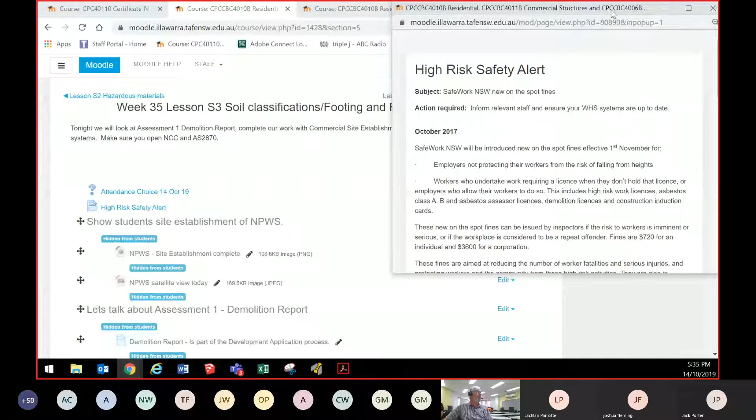So one of the first things we've got here is that you should be subscribing to information that constantly comes in that tells you about new changes or things, accidents, dangers or hazards that are coming up. Here's an example of one that came through some time ago, but I just got one this last week while I was away that came through from SafeWork, and there's newsletters and things that come regularly.

This particular one is a high risk safety alert for new on the spot fines, and this is to inform relevant staff and ensure your work health safety systems are up to date. This information is on SafeWork's website and comes through regularly. You need to subscribe to this now, just like you get Facebook or Instagram notifications, add SafeWork New South Wales for your notifications so you can keep up to date with what's happening and find out about the latest things, which happen quite regularly.

Now we're going to have a little look at some site establishment with the National Parks and Wildlife Service site that Brett was involved in down in Narooma. This is an example of one of the activities you had last week that Frank was working on with you, and here's an example of how the site shows you need some sort of description at some point as to where you're going to place things on the site.

Not sure if you've had a look at that site, the one Glenn did, but it's on Google Images and you can see it's all worked out pretty good. But somewhere on a site, when you often don't have much room, you've got to have a good plan in place to know where to put everything.

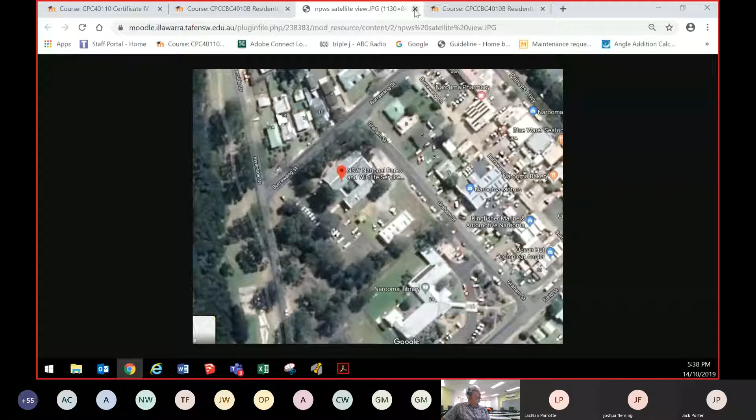It's really important that you come up with a site plan before you even go too far, so you know where to tell the trucks when they start delivering sand, bricks and materials onto the site. You have to make sure you know where things are going to go, and part of that has to be done on a demolition report.

So we're going to have a quick look now at the assessment that's open for you for the demolition report. I put a couple of things up here specifically for Wollongong, but every council and local government authority has this information available to you. What I want to talk about briefly is what happens when we have to do demolition, because demolition is something that often has to occur before you can do some building.

There's a bit of information here about whether demolition is part of the development application process. In the case of demolition, full details of the age and condition of the buildings or works to be demolished must be provided. You must also provide photographs of the building to be demolished. So demolition requires a lot of different things, and if you have to demolish something to build something new, you're going to have to put in a plan in most cases to be able to demolish it.

I'm going to show you the Wollongong Development Control Plan, which I've made available to you there. That's going to take you to the site for Wollongong for the Development Control Plan. It's a really big plan, in fact so big that they've broken it up into chapters that you can see here.

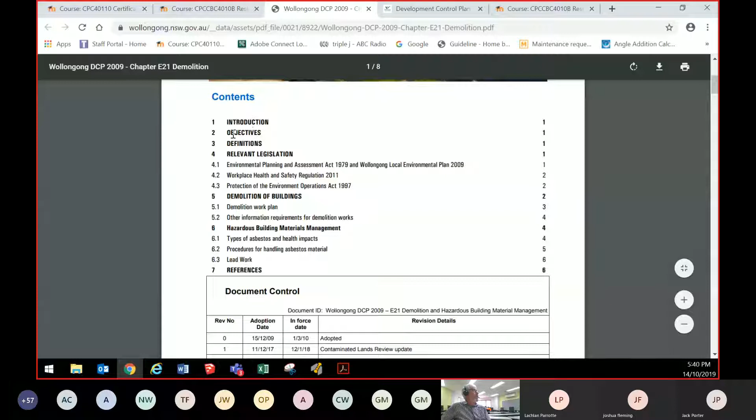They're going to give you an introduction, some of the objectives as to why they've produced a booklet like this, some definitions - and that's always at the front of these legal documents so that everybody knows the term they're using relates to the same thing right across the whole board - and then it relates to relevant legislation.

And then we've got the Environmental Planning and Assessment Act 1979, and Wollongong looks like it's operating under a 10-year-old local environment plan. Now Wagga has a local environment plan, Griffith has one, Moruya, everybody's got a local environment plan, because all local government authorities have to develop these based on the Environmental Planning Assessment Act, and it's usually added onto from there.

The development control plan exists because the local government authority is in charge of all the development within their region, and that's because they're closer to the people who live in the region, so they can take into account the types of things that the local people would like, hopefully, when they develop their plan.

You have input every 5-10 years or so when they make a new plan to be able to have a say as to how far you want the building set back, what development you want to occur in different areas. What about that massive development down at Shellharbour? There would have been a lot of local input into that, hopefully.

And then the developers have to meet certain guidelines to be able to do things, and if there's any demolition involved, that's where this all comes in. So we've obviously got to adhere to the work health safety regulation, protection of the environment operations, and then we come to demolition of buildings. This is what relates particularly to your assignment number 1, the demolition work plan.

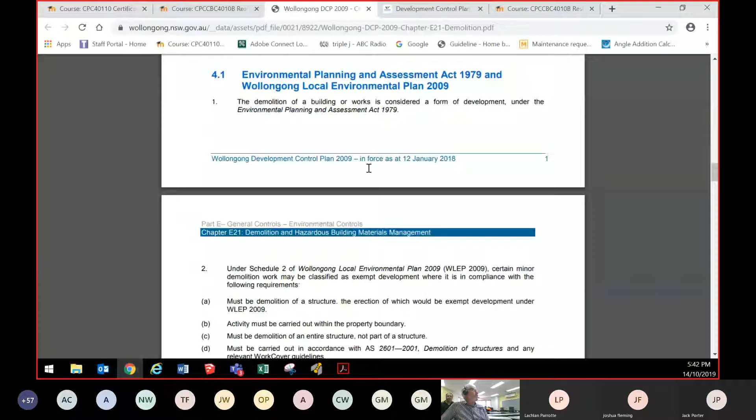Activity must be carried out within a property. Must be a demolition of an entire structure, not part of a structure. This is dealing with under Schedule 2 of the LEP - certain minor demolition work may be classified as exempt where it is in compliance with the following requirements.

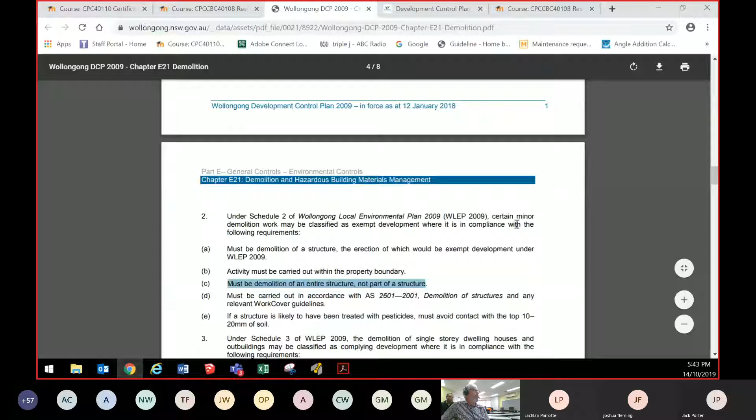So we've got work health safety, we've got protection of the environment operations, and demolitions of buildings. And there's an Australian standard for demolition of structures right there, 2601.

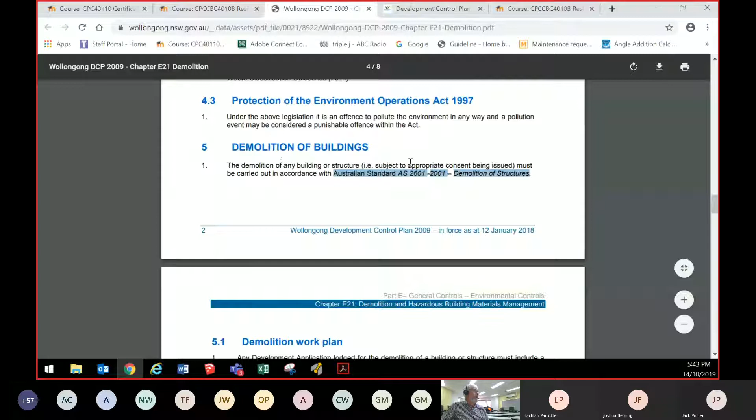That will be the one you'd want to be familiar with, and that's going to talk about a lot of structural technical details to do with demolition. That's the one that we have to carry demolition out in accordance with - it says it must be carried out in accordance with that standard.

Here's the demolition work plan, and if you look at this it goes from 5.1 right down to 16 - 16 points there. That's pretty similar to the sort of things you have to do on your assessment 1.

It says here, any development application lodged for the demolition of a building or structure must include a demolition work plan. It should include the following information: site location plan.

Okay, so we talked about that a minute ago - I showed you the one from the National Parks and Wildlife Service down there at Narooma. That was a location plan of the new building, but there would also be one showing the building or structure which is proposed to be demolished.

Need names and addresses always, and contact details. Details of any qualifications or experiences. May be that you need asbestos removal people, so that information would need to be there.

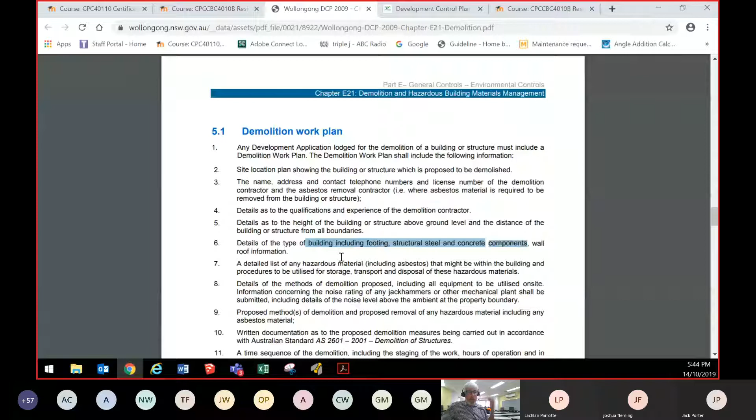The height of structures, that's because the higher things are, the more dangerous they become. We also need the type of building, the footings, structural steel, concrete components, whether it's been pre-stressed or post-tensioned steel in the building. Some large commercial buildings have that type of concrete, and you can't just start jackhammering it because it may explode on you and kill people.

We'd need a detailed list of hazardous material. As soon as you start to talk about asbestos, for example, there would have to be a plan for how to remove that asbestos, even to the stage of having a map of the directions from the asbestos site through to the final disposal site, and showing the time of day of when you're going to go, in case WorkCover want to drive behind you that particular time and make sure that bits of asbestos aren't falling off on the side of the road. So even that has to be done.

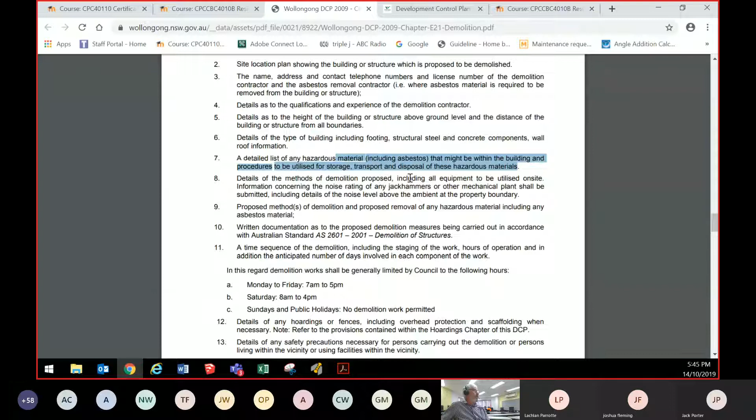Details of methods of demolition proposed, what type of equipment you're going to use. So that information right there would be real helpful for you for your assignment. And just to refresh your memory again about where that's found, that can be found right here on tonight's lesson.

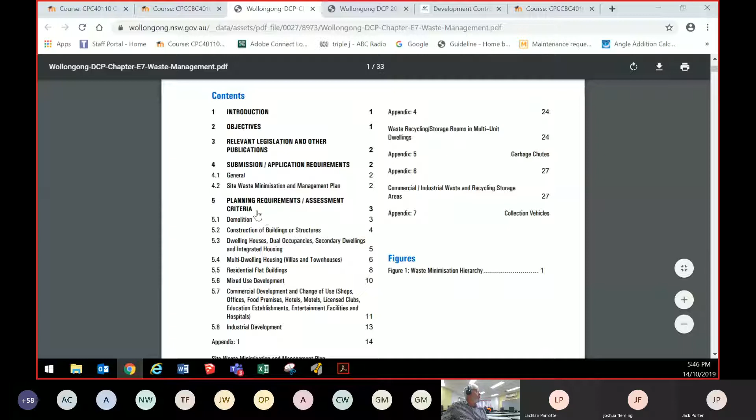So then there's one here called waste management, which I want to show you, and this is an overall part, 33 pages on this one about managing waste, and there'll be something there specifically for demolition. You can see there, I think it might go straight through to it.

There it is. So this talks here, quite a bit of information about how there's a page and a half about demolition and the things we have to take into account. So you would want to read that before you do your demolition work plan.

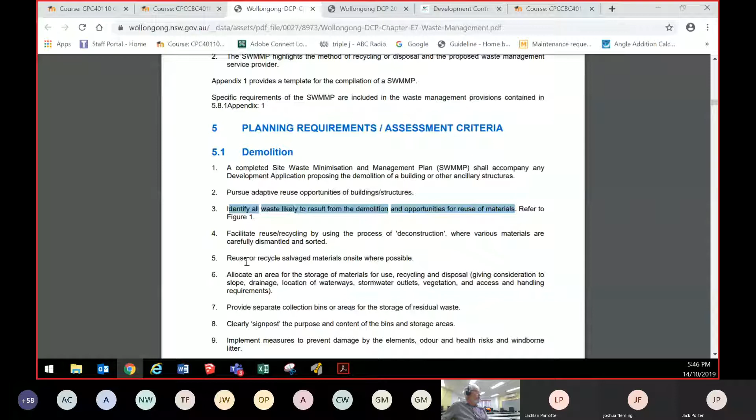For example, identify all waste likely to result from the demolition and opportunities for reuse of materials. Facilitate reuse or recycling. Allocate an area for the storage of materials for reuse, recycling and disposal. Those sorts of things need to be taken into account, separate bins, clearly signpost the areas. So this should help you with assessment number 1.

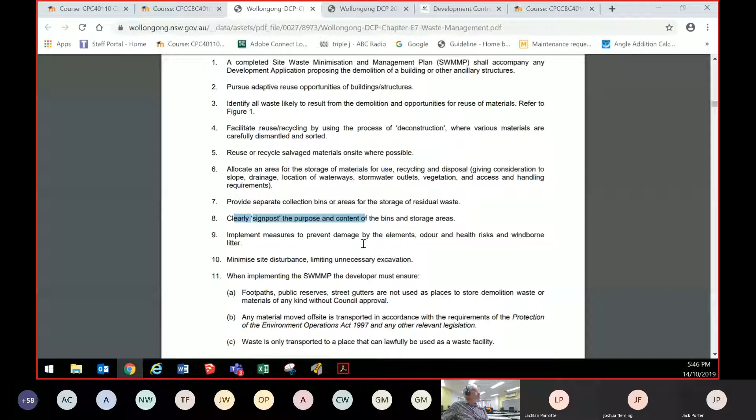Then you go through here and they keep on going down. They've got a table here with examples of demolition materials and potential reuse recycling options. Look at all the materials there, 10, 15 materials listed. And if you have any of those on your site that you're planning for your demolition, you would want to make a note of how you plan to

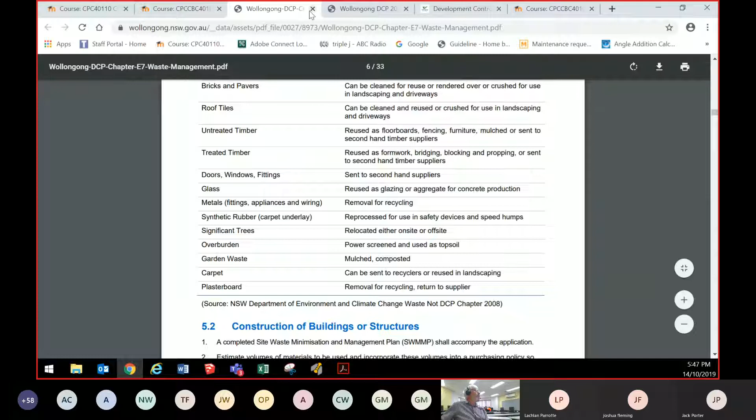This particular one is because when you look at development application forms and checklists, this is what you do when you want to build a new building in Wollongong, and every local authority has this. If we look at a checklist, there's a demolition option down here. And if I scroll down here to the demolition one, which is down towards the bottom, I think I found it.

Just do a quick search for that one. There we go, the demolition, and I'll call up the checklist. And here's the check here, for example, is the checklist, application for demolition only. So you'd read all that through.

Please tick each box, document transmittal, see reverse of this checklist. So that'll be over the page, which is just here for documents and things, plan number, revision number, date, author, things like that. So they want to see all the paperwork that goes with this application.

Then you've got all the normal things there, like who it is, any disclosures or anything, correct fees, and that information there is possibly going to be assisted by the person in the council to be able to fill that in. And then they need copies of documentation, statement of environmental effects, as per, etc., etc.

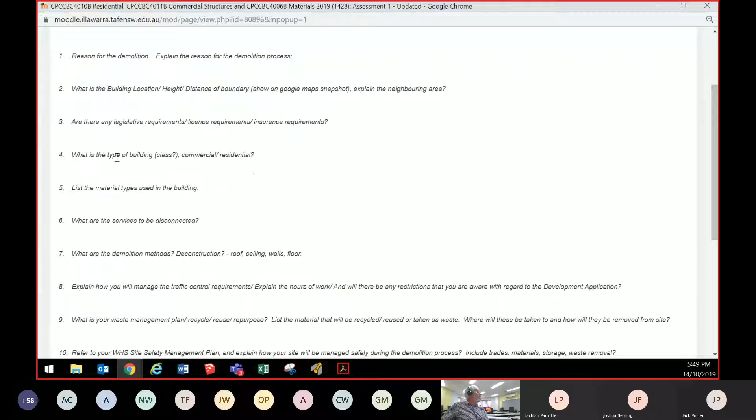And this is pretty much the sort of things we're looking for in assessment 1. So you can see reason for demolition, what is the building, location, height, distance. You remember me showing you that on the Wollongong demolition site there. Then we've got any legislation requirements, what type of building, list the building material types, services to be disconnected, what are the demolition methods. So a lot of this has been shown to you there. What's your waste management plan? Refer to your WHS site safety management plan, and photographs.

And the questions just come through to me here. Are we just making that up? So let's go back to the...

I'll just open up another one here and have a look at the assignment, because I'm probably getting a few questions on that. So Brett said there, remember licensing requirements from last week, maybe save it and add it to your builders file packages. So I've put some things into your builders file packages. The question I've had here, are we just making that up?

Let's have a look at what the assessment actually says. So we go to assessment 1. Of course, you've got to check, acknowledge that you understand how you're going to be assessed before you can do any of these. So make sure you tick that.

And here's assessment 1. It says provide a proposal to demolish the elements of a structure. Complete a demolition plan for part A residential and part B commercial. Now, you all know what residential and commercial is now. That's going to be referring to a classification of the building. There's 10 classifications, and quite a few of them are for residential and quite a few of them are not residential. So it says see document attached as a guideline for your report.

And that's the one that I just pretty much showed you then, which is just coming up on here, and that's items to consider. So I've got somebody coming in on the speaker here. Maybe just type in the chat box if you've got some more clarification on that, Brett, because I wasn't here last week actually. So that's your assessment 1.

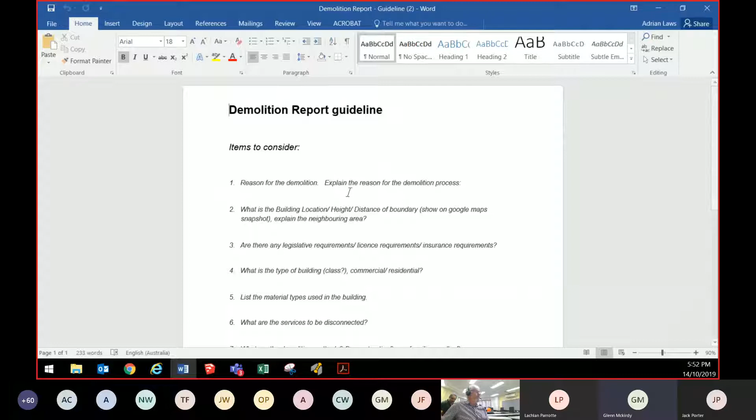Okay, so there's part A, part B, right? So, okay, as painful as it is, to be honest, if you do a residential demolition report, I would pretty much say as an assessor or a teacher, I would know that you're competent to be able to fill a whole one out. But the actual unit we're doing is apply structural principles to residential and commercial, so we need you to show evidence that you understand how to do a demolition report for a residential and a commercial job, right?

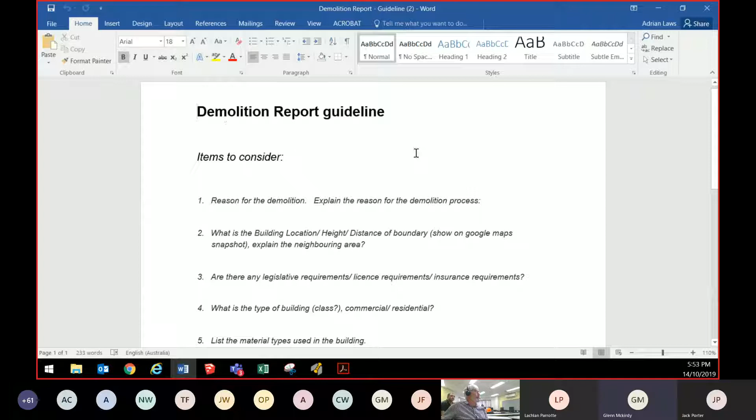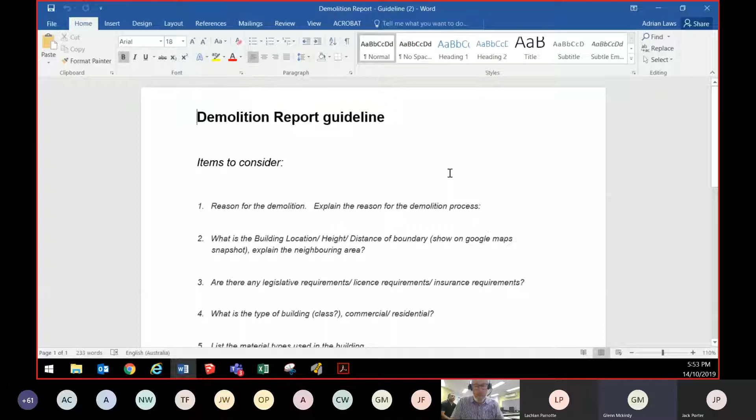So you actually need to do on that screen, see from questions 1, if you can scroll down for us Adrian, to, I think there's 13 questions. Put up the top there, maybe Adrian, part A, right? Part A, residential, and you need to write about it. Class 1A building, I'm going to demolish my house for a subdivision, that might be a reason. Then copy all those questions, and maybe we might fix this up tomorrow, make it easier for everyone to understand.

Copy all those questions, go down underneath, go to part B, commercial, and attach all those 13 questions. You're going to say the reason for demolition is I'm going to blow up and implode the TAFE building because I'm sick of Brett talking, or something like that. Does that make sense?

That's good. Anybody else got any questions there? Craig's asking, if you've got a restricted demo license, is this possible as part of RPL?

Talk to your local teacher about that. Good question, that's raised a really good point though. There are actual licenses regarding some of this type of work.

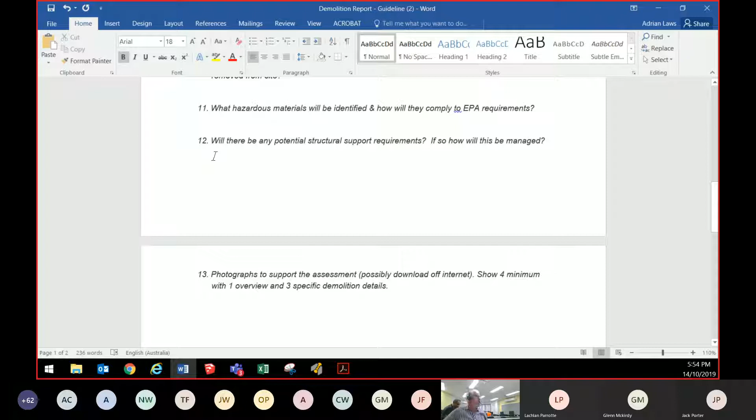But for this particular activity, to be honest with you, the easiest thing to do to pass this unit is to grab that information, and Brett's going to make some adjustments to it on the site there, and call one of them residential and one commercial, and answer the information. Put the pictures in, pick a building somewhere. I would pick an old building, obviously, and you can do that real easy.

Now, I've got one student who is not actually working on building sites. This is what I would probably do, which I'm pretty sure would be okay. You just jump on maps somewhere, go and find yourself an old building that looks like it needs demolition, and grab some photos of it.

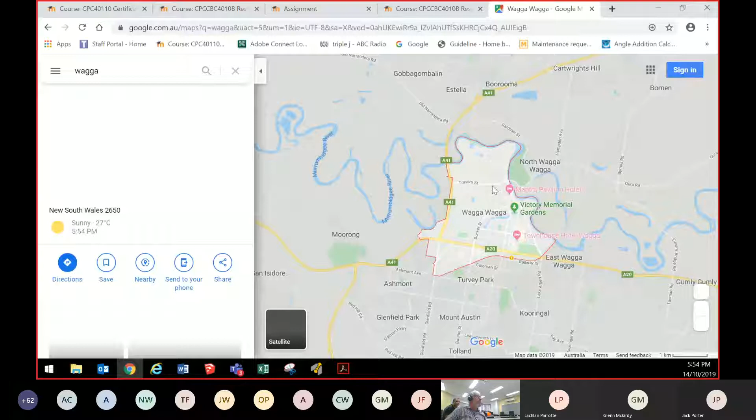Go and get as much information as you can. Pick yourself an old area of town. And I know one that happened just recently, there was a fire. So why couldn't you do this as a desktop type thing and then go out and visit the building?

Just be very careful going and taking pictures of people's buildings. But you can either go and ask people, and just say it's part of an assignment, or you can actually grab some photos and debadge the building.

So there was a fire down this street a couple of weeks ago, the last building on the end, and a couple of our good old students here from TAFE have been doing it up. So this particular building looks quite different today because it pretty much burnt down. So you could pick a building like that. Why couldn't you do something like that and get all the relevant information and put that into your assignment?

Obviously, just be cautious, because I was doing an assignment like this years ago, and someone came out the front shaking their hand at me saying, 'What are you doing taking pictures of my building?' And I had to kindly explain to them I was doing an assignment, and I promise I'll block out your street address and everything. So just be cautious of that.

So hopefully that helps. Are there any other questions about that? That's a good point that Brett's made there. Try and use your own building if you can.

Pick a commercial building somewhere. You're welcome to use the TAFE or something like that. Just be conscious of private property and conscious of some of those issues that you might have. Public buildings like hostels, the bigger and more public the building is, the more cautious you've got to be, because these days we don't want people walking around taking photos of things that could raise a few eyebrows.

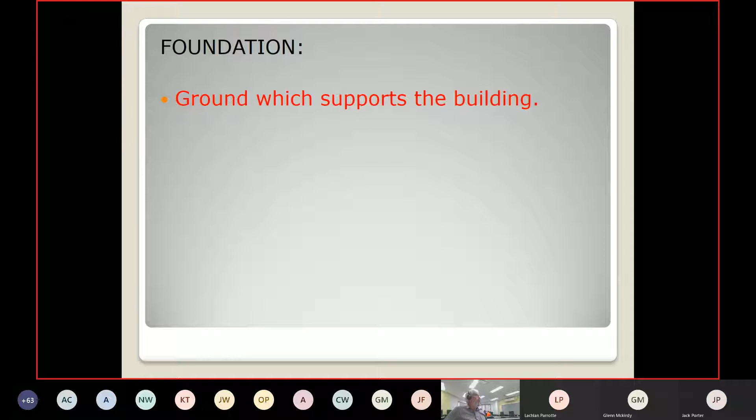There's a thing called the allowable bearing pressure. Those three words, allowable bearing pressure, form a legal definition at the beginning of Australian Standard 2870.

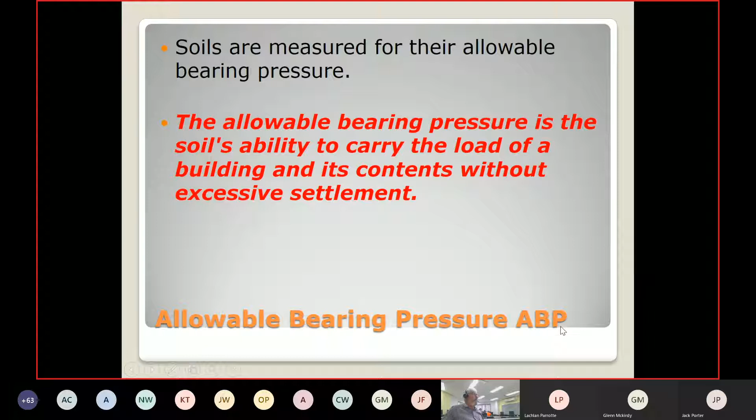It means the ability of the soil to carry a load without excessive settlement. If you see the capital letters ABP, that means allowable bearing pressure.

For example, for one- and two-story buildings, the NCC -- and I've abbreviated it now because we know that means NCC, not BCA -- requires about 100 kPa, for example, under strip and pad footings, and 50 under slab footings.

kPa is kilopascals, written with a little k, capital P, little a. That's the international standard way of writing that.

Every time you write that, you should have little k, capital P, little a. Right across the world that's understood to mean kilopascals, which relates to the weight of gravity plus the weight of the item itself. One of the problems we come across with buildings is reactive soil.

If you go, how far is Hay west of here, you guys? Three hours? Three, three and a half hours west of here to a town called Hay, you'll find highly reactive soils. If you were to go and look at the Hay Courthouse, we could go for an excursion, but we'd run a little bit late tonight.

If you had a look at the Hay Courthouse, it's built so that all the main load bearing is down below the building, below all the reactive soil, which is in the top half a metre or metre or so of the soil. Out at Hay it gets real dry in summer and dry in winter the last six or seven years.

But if it does get wet, it expands a lot, and the soil can grow in height. If you measured it against sea level, it might grow by a couple of hundred millimetres. So the building has marks up and down these big solid buildings, and they build the footing so it goes right down to the non-reactive soil.

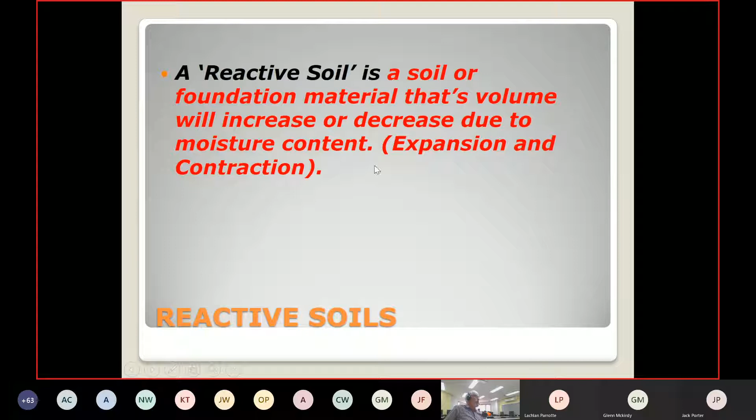Over in Canada and Alaska they have a thing called frost heave. So when you're driving along the road, it looks like you're driving down a real bumpy road, because the ground freezes and expands and contracts.

And that's the technical reason as to how it expands and contracts -- a bit more about how it expands and contracts. It's a little bit technical, but the main thing to remember is that the volume changes.

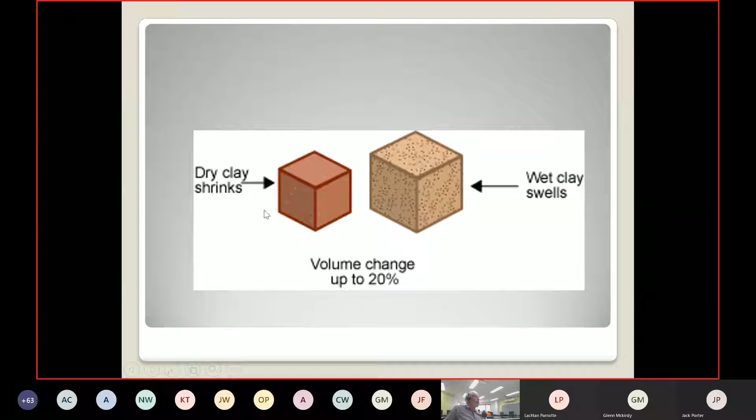And that can be bad for us, because if we have wet clay soils on half the building and dry clay soils on the other half, we might have this sort of problem, shown by this diagram here.

If the outside of our building gets dry and the inside's damp -- because there might be a leak, or because the outside's dried out real quick -- we might not have enough support under the outside of the building.

Or if the outside of the building gets wet and the moisture hasn't transferred into the inside, we might have a bit of the inside of the building that's just sitting there not being supported.

Are you laughing at me? I thought I must have said something funny.

And this is what can happen with a bit of a problem that can happen with buildings. So the next point is, who's ever seen a building with a crack in it? I think everybody has, and that's an example of it.

There's two main types of cracks in buildings with masonry. One crack will follow through the brick and just go in a line, and the other will follow the brickwork, going along the mortar. If it goes along the mortar, that's generally not quite so bad. If it's going straight through the bricks, irrespective of the mortar, that's usually a little bit more sudden and a little bit more urgent, that something might need to be done about it. It might not need to be done about it, but it might.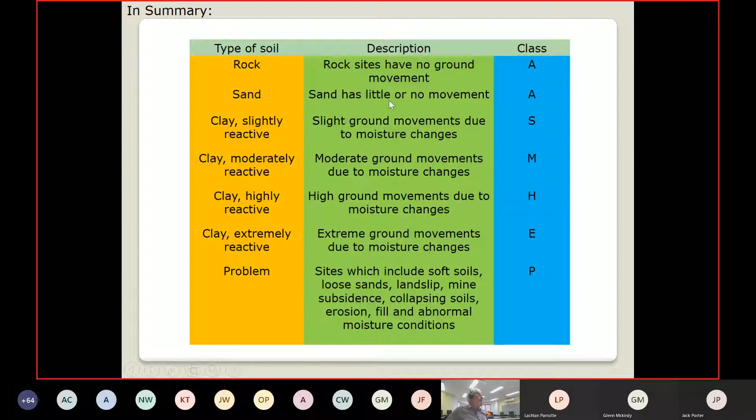These ones up the top here, there's 5 of them, you could actually specify your own footings, which you're going to do as part of an activity tonight. You could specify the type of steel, the cover of the steel, the type of concrete, the thickness of the concrete, and everything yourself. This is all an engineer is going to do for you. They're going to look at the classification of the soil and say it's S, fairly stable or slightly reactive. So if it's an S-type soil, we can go to a chart, look it up, and determine how thick the footings need to be and what type of steel and things like that. This table is basically a summary from the construction code.

But we don't know what type of soil it is unless we're soil experts, and we have to identify the soil profile using established and existing data. In most cases, I'd say 99.9% of the time in a new building, we would get a geotechnical report. That report is going to take some soil, put a little bit in a container, weigh it, put a certain amount of water in, weigh it again, and measure how far it's moved, and all sorts of fancy things. They go to university for 4 years full time to learn how to do that, so obviously it's pretty complicated.

And then they come out and they're able to say how reactive the soil is. So, soil mechanics - I have an engineer sitting behind me who keeps me on track. But you have to know what you're doing with that, and that's why we get a thing called a geotechnical report.

There's people in your region who do that, and probably most of you have seen that listed somewhere. If you get the engineer's details on the plans, it'll say what the soil type is, usually coming from the engineer who has done a test in any one of a number of ways. Here's an example.

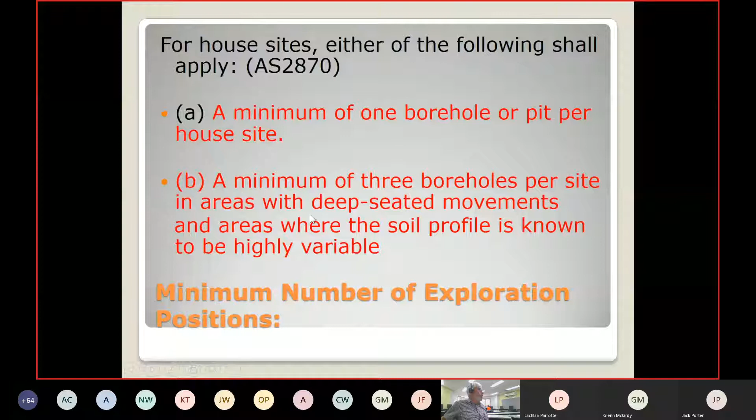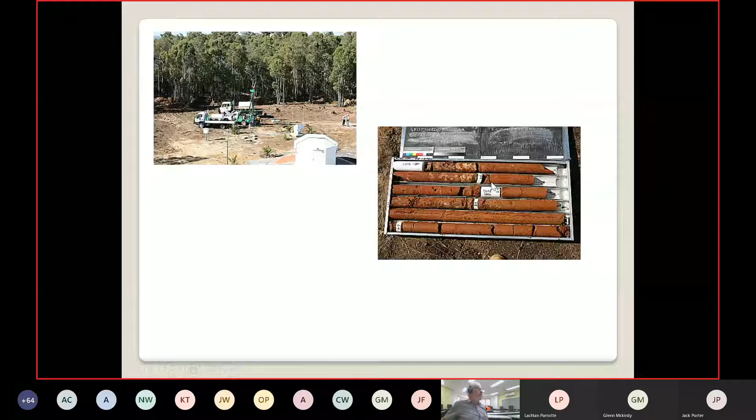It says here in 2870, a minimum of 1 borehole or pit per house site, or B is a minimum of 3 boreholes per site. Here's an example of what they do. Note the guarding around that spinning drill bit - they come out, put a little trailer down there, drill a hole, put it into a case like that, take it back and test it, and put it through all sorts of scientific tests. Does that make sense?

That's called soil classification - that's the way to really classify soils. I'll go to part 2 of the Australian Standard 2870, which I've fired up for you all here. You can see there's the chart there, the table.

I want to throw the chat line open here so you can tell me what your experience has been - who's ever seen a soil test classification before, and what's the most severe one anyone's ever seen. Just put it on the chat pod there. I'll open up a couple more things here. What's the most severe type of classification that anybody's ever seen?

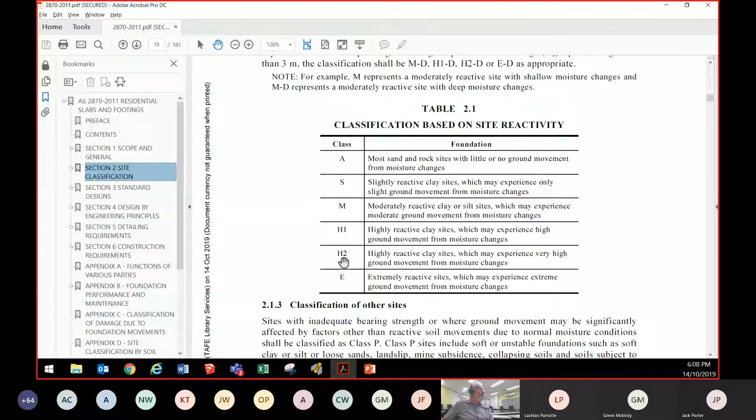So A is the most stable - it's great to build on A. A lot of Sydney City is built on A. Then when you go to extremely reactive sites, or E, they may have been maybe even fill sites - in fact P is a fill site. So sites that have been filled, and things like that.

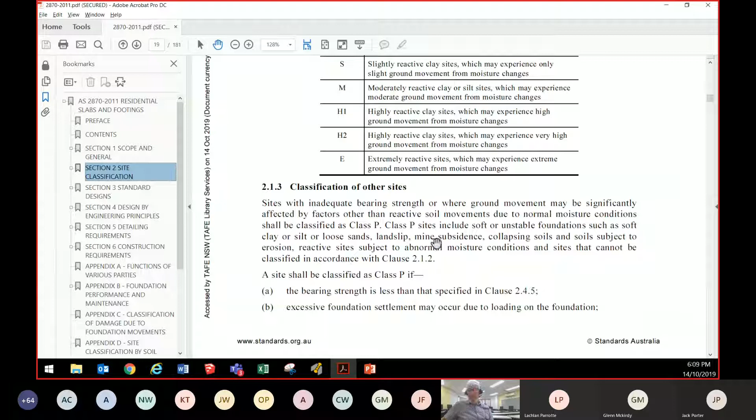Okay, can get to H2 around Hay on the River. Thanks for that, Craig, very good. So it can get very, very expansive, and we've got to take that into account.

So 90% of the time we're going to have to choose a footing type that'll be able to give us some resistance about that. I gather in Wollongong, up and down the coast, you've got a fair bit of difference between rock and alluvial type soil. It's the alluvial soils which can create problems. We have a lot of that in Central Wagga as well, where we have alluvial soils, and in some cases you dig down a couple hundred mils, maybe 300 or 400 mil, and you've hit the water table, and after that it can be soggy.

Now the good news here about this topic is that you don't have to be the expert. In fact, you shouldn't be the expert - you should always rely on somebody else. You can do a certain amount yourself, but you really want to rely on somebody else to give you the documentation to confirm what is actually required to be built.

So here's an example of some of the different types of footings. When we look at the Australian Standard 2870, which this picture has been taken from - can you guys stop talking there, please - we can see examples of some of the different types. Most of you would have had something to do with a strip footing, a pad blob footing, raft slab, pier and beam, thickened edge beam attached to the slab.

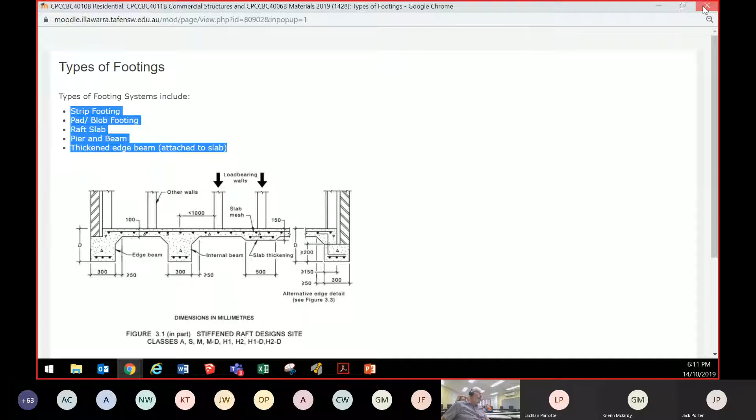Okay, so we have the points being made here. We have, did you say 5 foundations? Yep, so we're going to go into foundations. We broadly looked at our foundations there, but the main foundations we're going to be dealing with will be given to us from our soil geotechnical report that we get.

So when we look at how reinforced concrete works, we can see reinforced concrete is basically concrete, because concrete itself is really good for compression, but it's not so good for tension. But steel is real good for tension, but not much good for compression. We put the two together and we have reinforced concrete, which forms a really strong structure, used almost everywhere in construction these days. There's a lot of good information on how that works there.

We can do lots of different things rather than just pour concrete around steel and have reinforced concrete. We can have pre-stressed reinforced concrete. We can have post-stressed reinforced concrete, where we stress the iron and then pour concrete on top, then allow the stresses to let go with clamps at the end to pull stress on it. Or we can put conduit through the concrete and then pull wires real tight through them. Those things are very specialist, and you want to know what you're doing when you're dealing with that type of work.

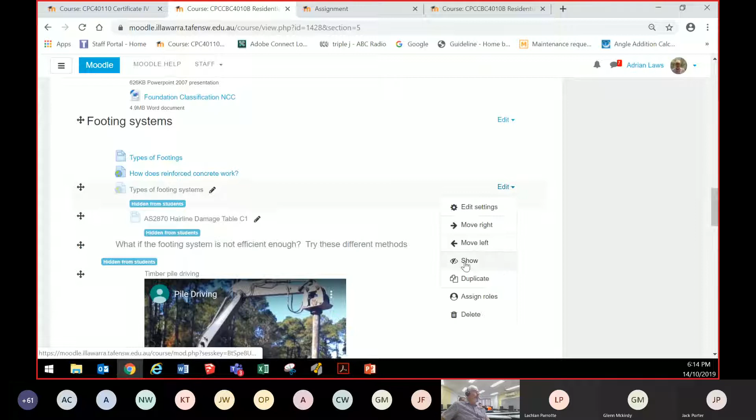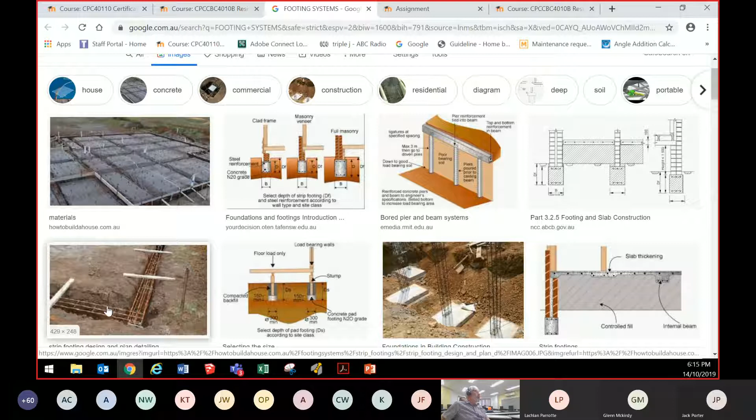So you guys can have a look at that, and girls, and see how that all fits in.

Then we go to the hairline damage table, which I just showed you earlier. I want to show you an example of our New South Wales guide to standards and tolerances. They've got a 2019 one coming out, I'm not sure if that's the 29 one. I'll go to the actual website so you can see. This is the guide to standards and tolerances for buildings. At this stage there's only the 2017 one, and this is like your little guidebook.

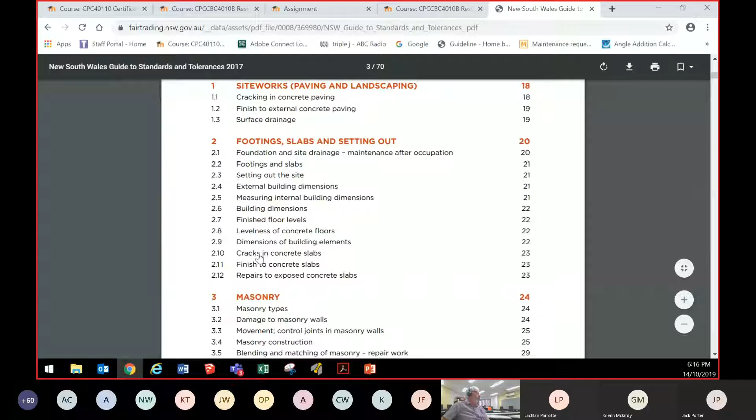It says at the beginning that it's not a legal guidebook, but it's a really good summary of the different things you need to be aware of. So when you look in here for things like cracks in concrete slabs, it will point you to Australian Standard 2870. But the average layperson can't understand that, so here we have some examples that are taken from that, just dumbed down a little bit. You can see it's been taken from there, and this is an example of the crack.

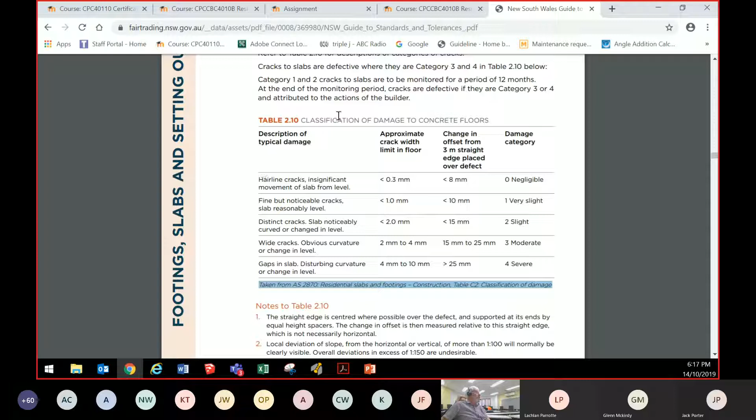People will come up to you - a friend asked me recently, can you go have a look at a house my daughter's thinking of buying, a brand new house by a reputable builder in Wagga, and said there's some little cracks in the slab in the garage, not sure if they're significant. So I referred him to this document and said read this first and measure it up against what you see, because there's a couple of things you've got to remember - some things are allowed, they're just part of normal variation with construction and buildings, but some things aren't allowed.

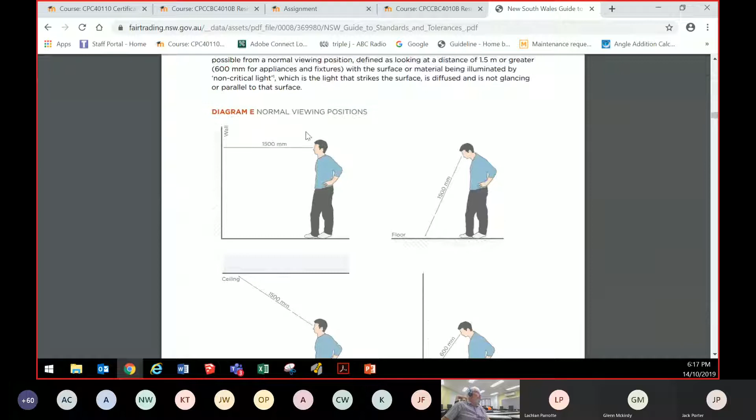You have to remember there's a thing called a normal viewing angle for things - we've talked about this already, where you can't get a microscope up next to the floor and say I can see a little crack. You've got to see it from how you'd normally view it, and that's the key thing with these things. So you need to have a look at and be aware of that information so that you're a knowledgeable person when you go and talk to people about what is normal and what is just a variation with building.

So I'm just going to have a look at a video now. What if a footing system is not sufficient enough? I'm going to show you this 1.5 minute video on pile driving, which is a way of achieving piers, tall piers into a building site, so you can obtain enough strength to give resistance for the building so it can be stable.

As you watch this, I want you to think - Venice is basically built on timber piles like this. The history is that probably about 1500 years ago, people felt a bit insecure on the coast, so they fled out to some of the islands, which was harder for people in ships to chase them. But the islands weren't great to live on because the tide came up, got boggy, got wet feet, so they started driving piers into the ground.

They used timber because even today, if you look at a lot of the piers around the coast, many are still timber, because some timbers are more durable than concrete and steel and can resist termites and all sorts of things. So they drove the timber down, put the buildings on top, and pretty much the city's built on that. A lot of structural buildings are like that - Newcastle TAFE has some buildings built like this, they may not be timber, they might be reinforced concrete or steel.

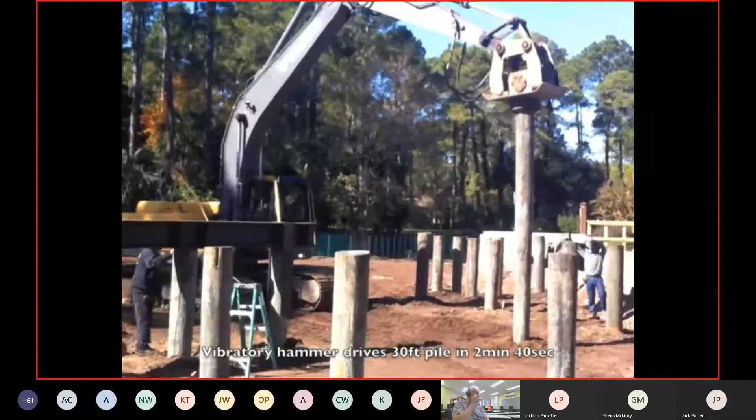Must be soft ground.

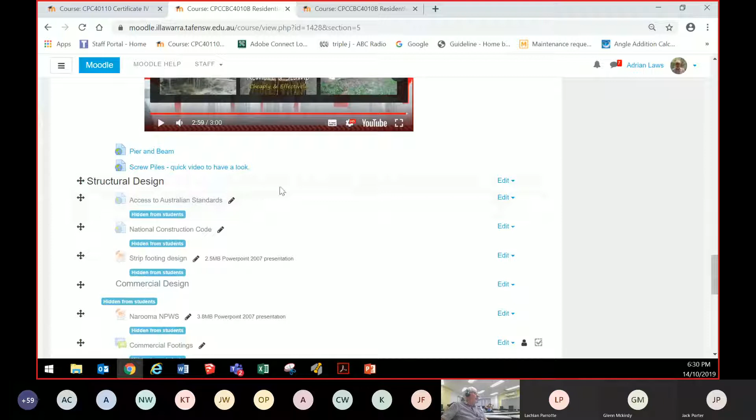No, I'm going to let you play that one yourselves. So that's that video there on pier and beam, and then screw piles that are here. We're up to 6:30, so I'm conscious I don't want to take too much more of your time without you doing some activities. There's screw piles there, which is another quick video you can look at yourselves of some different methods that are available.

Now, by now, everybody should be having access to the Australian standards, and you should also have access to the National Construction Code. Just remember, use your normal TAFE username and password to be able to access those.

And then we have a quick PowerPoint here on strip footing design. And then I want to quickly get onto some of the activities for tonight. So we've got the strip footing design that's coming through here, and just pump that one up to the full screen, so I think you can see that okay. And just show the whole thing there.

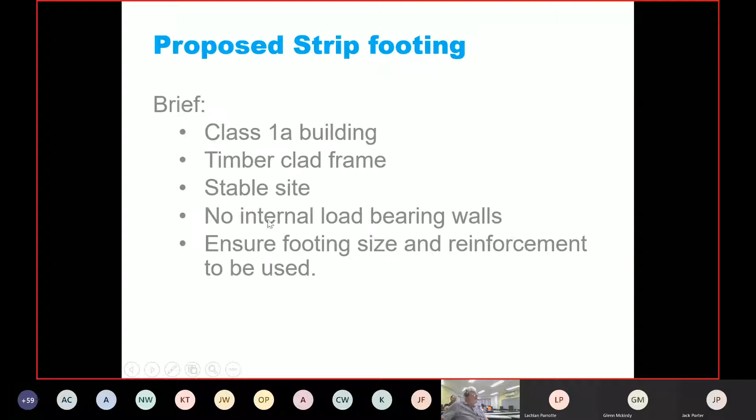So you can see proposed strip footing, for example, Class 1A building, timber clad frame, stable site, no internal load bearing walls, ensure footing size and reinforcement is to be used. So in this particular exercise, how do you find this information? We go to the National Construction Code, footings and slabs, and it'll either refer us through to 2870 or give us some more information within the National Construction Code. Normally, National Construction Code these days just takes us straight to the Australian standard.

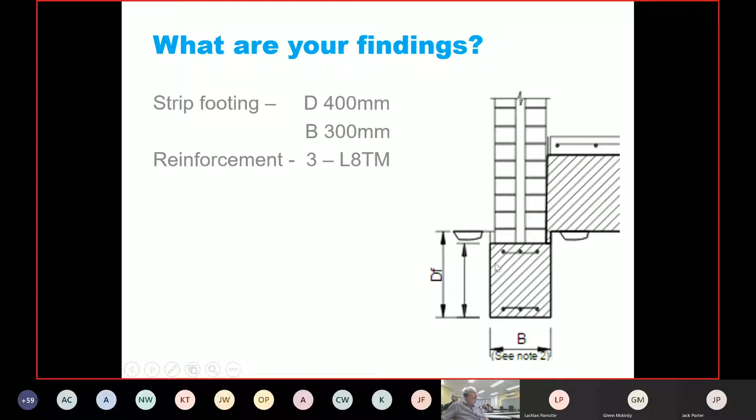And here's an example of what we may end up with. So these are just hand-drawn sketches, and if you get an engineer to come out to your site, you should be able to sketch these off the top of your head for sizes and things, and look up all this information. So D is the depth of the footing, 400. B is the breadth at 300, and it'll tell you the size of the steel that goes inside that footing. You've got to check your notes. There's always notes underneath these things, and you need to check them and make sure that they all relate as well. That's a little PowerPoint that's there for you.

Just shut that one down. That's a PowerPoint that can help you with your strip footing design.

Okay, and then we've got information here on a commercial design, and this is an example from a job that Brett was involved in and can tell us a bit more about. We might even grab Brett in a second to chat a little bit more about this, but I want to open up the chat pod so that you can get yourselves a little green box. You can see on this particular one, I think that's opened up. There's the National Parks and Wildlife Service. This particular chat box has been opened for you. And what it's asking you to do here is to refer to the National Construction Code and comment on the best way of designing a commercial footing system for a Class 5 office space.

There is this is a one sentence answer. Think about it as a builder. What's the best way to get this design? So we're thinking from a point of view of a Class 5 office space. And here's an example of an office space. We want to have a look and think from the point of view of the National Construction Code of how could we design the footing for it.

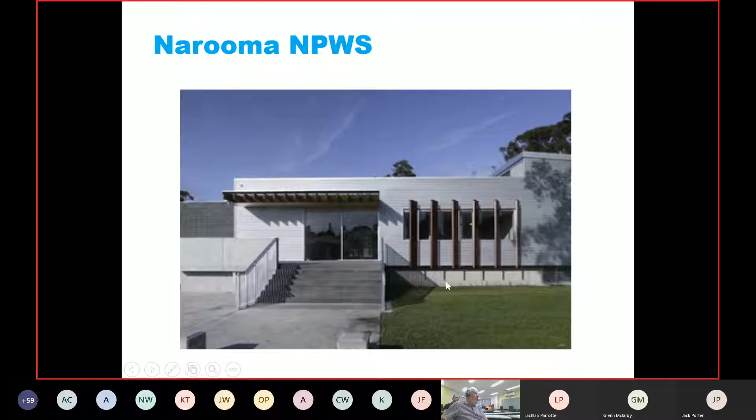So how do you go about designing the footings for something like that? That's the outside of the building. This is fairly well, you've got load bearing on the outside. You've probably got some load points here and here and here, all the way through with columns.

I would say that looks like a bit of a portal frame construction. I can see a framework coming up here, across there, down there, probably another one there. So what do you think we're going to have underneath each of these columns?

We'll have steel behind there, those timber covers possibly. We're almost certainly going to have piers underneath that, which could be in the form of a driven pier, just near the water in Narooma it is, near the waterfront. So it could be an alluvial type soil, but we're definitely going to have some sort of extra strength under there. We're not really going to need anything more than a floating floor slab here in the middle because there's no load other than just the normal office type load.

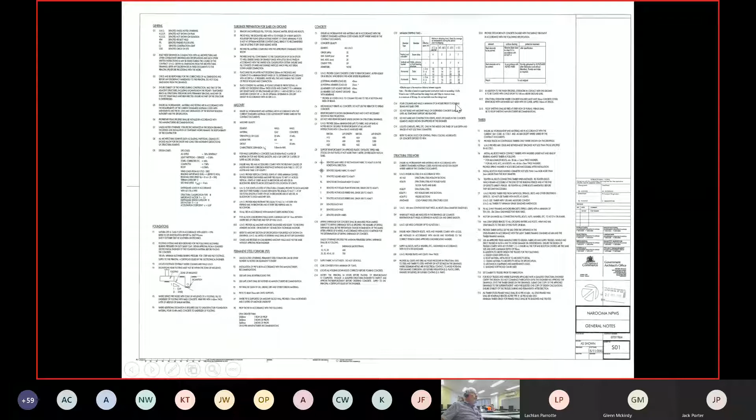Okay, so as we look at this building, there's an example of the plans for it. Now you can't read that and you don't really need to, but you've all seen plans like that where it's got all that information. Look at these drawings and all these tables. They're probably taken as a copy straight from an Australian standard. It's probably general information from an Australian standard, but the engineer grabs it all out of the Australian standard and puts it all into a document and then adapts it for this particular job.

Look at that example right there. That's probably taken from an Australian standard, and the details there, this keyed joint, KJ, is probably what you would find in the Australian standard, but they use codes and things like that. And then over here, there'd be key joint listed in here somewhere. You can see that all blends in, so that we've got all this standard type information. It's been drawn specifically for this job, but that's an example of where they get the information from.

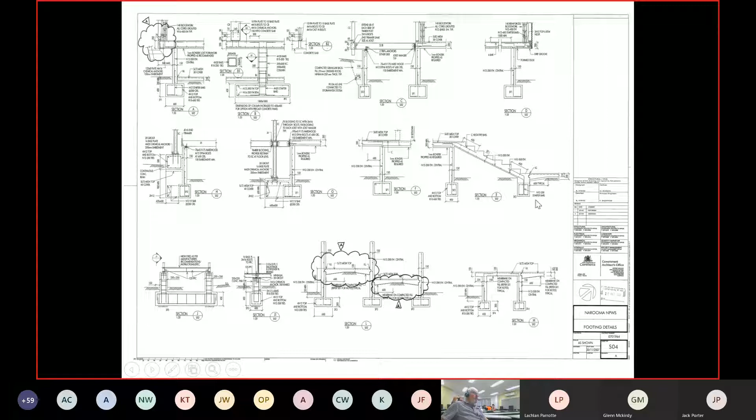Somewhere over here, it'll say refer to NCC or an Australian standard, possibly 2870. If they've designed some particular product by themselves, then they will have referred to those technical details for that particular product, like those piers that were being driven in with a machine as a screw jack type pile. That would have its own engineering details. It's not listed in there, the word helical is not even in that Australian standard.

So let's have a look at this little chat box here so that you can get yourself a little brownie point. And the question here is, referring to the NCC, comment on the best way of designing a commercial footing system for a Class 5 space. You shouldn't need any more than one sentence for that. Anybody willing to have a go? How could we design the footing system for that job?

Let's have a look at what Jake says here. Good job, get an engineer. Awesome. Let's see what Kieran said, get a structural engineer. Very good. You can do a little bit yourself, strip footings and piers for Lachlan. Yep, you're going to need somebody to specify the size of the concrete. Refer to an engineer, that's good. You can all have a little green badge on the top right of your screen because you've filled that in.

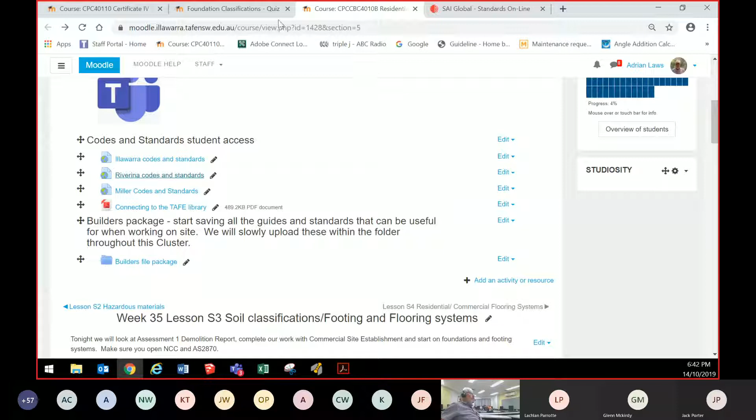When you log on there, it'll open up your details, and then it'll let you search any Australian standard - everybody's will look like that. You can see there's 2870 because I just looked at it today. So you'll need to jump on there and get that quiz open like I've got here. If you push that little middle button, you can drag it over there, and if you push this middle button up here, you can drag this one over to here, and you can probably answer them.

I'm just going to drag this down here because it might fit a little bit better. Let's get it up here like this, and you can do your quiz real quick. Get yourself a little green point thing, and then be on your way. So let's get ourselves a little green badge here. I'll help you do one, eh?

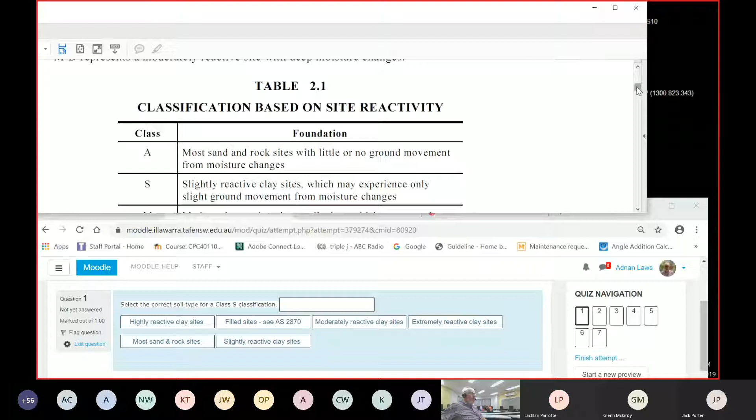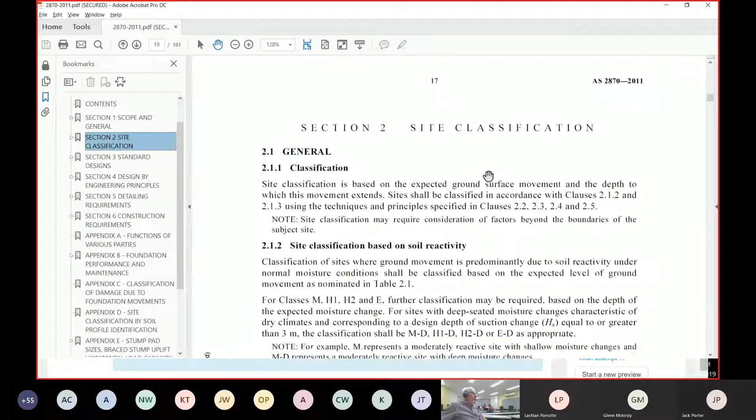That's a bit too big. Just got it on the corner here, and I've got to go across here. Oh, I've mucked it up there now. Site classification - where was I there? There's your site classification, and I think that's where we were.

Get back to here. Select the correct. So we've got S - it says slightly reactive clay sites. So I'd drag that up there like that. See how you feel about that. Have a go at the next one.

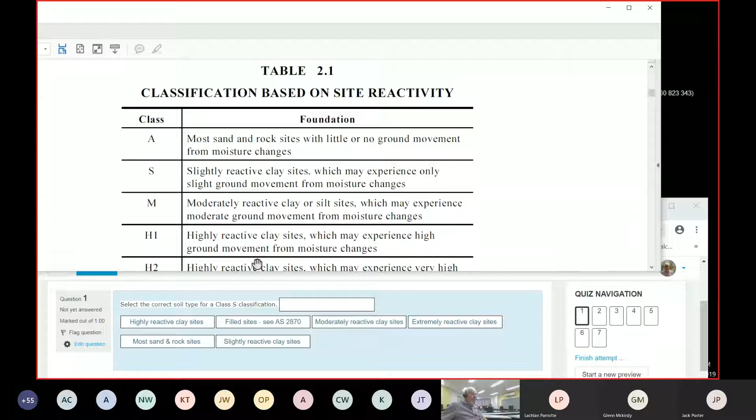And this particular one, there's E. It's not real hard, is it? So you can all have a go at that. Ooh, here's E - extremely reactive. So we just drag it up like that. And just keep working your way through those, all right?

Anybody having trouble with that?

The boss wore 80% of the blame - Riley was saying, even though they had nothing to do with it. So you really got to make sure you cover yourself legally. You guys really need to make sure when you start doing building that you've got a legal person who can help you with questions like this, so you cover yourselves. It's going to cost you maybe a little bit for the initial consultations, but you should have someone who you can get on call that you can quickly shoot an email anytime and they can reply whenever. They'll just save up their little bill and give you a bill each year or each few months. But you need to be able to get professional advice from somebody who knows all the latest rules and can put up a defensible argument in court if it ever comes to that. You can't deal with some of this stuff all by yourselves.

So here's our M, that's moderately reactive. I'm going real quick here, so I might be choosing the wrong one just in my haste. But pretty much you just work your way through, and you can see that you can answer these questions real easy.

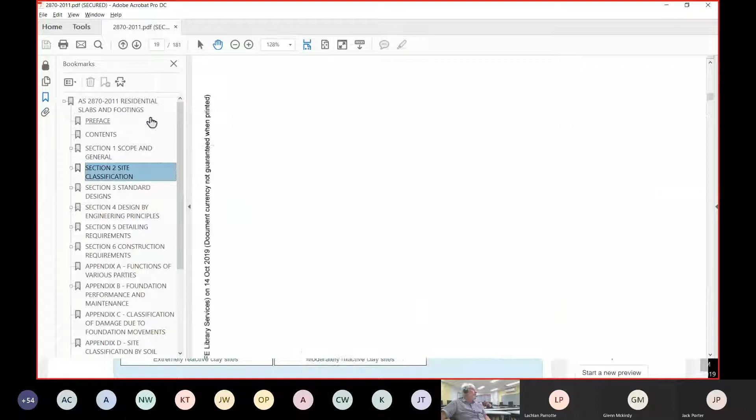Scroll the table down at the top - I'll just show you how to find that table. When you get Australian standards, the beginning of it's going to look like this, and over on the left-hand side you want to try and get a bookmark. You get it by clicking on that little bookmark tab there. Sometimes that can get lost, but it's real helpful because then you just go straight to site classification and scroll down and there's your table. There's so much information in here, it's unbelievable. It's really handy for designing this type of thing.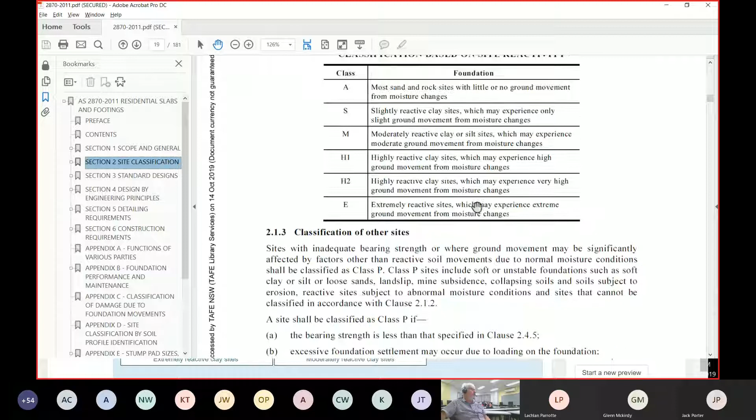So you just work your way through these questions, and I'm going to let you all finish that one off because I think some of you have already probably done it. You should be able to quickly whiz your way through and finish that.